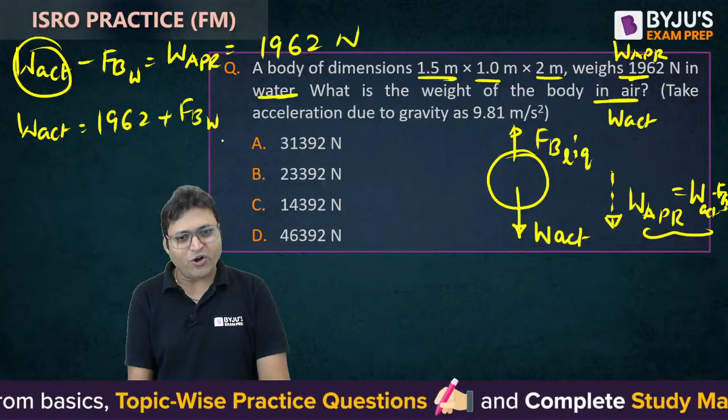According to Archimedes principle, we can find out the buoyant force by water: density of water into G, let me take as 10 because it is given as 9.81, but we can find out the nearest value, into volume of the body. It is not circular, it is a cuboid, so it is 1.5 into 1 into 2.

So 1962 plus, it will be 1.5 into 2, that's 3, so it is 30,000, almost 30,000, isn't it? So 30,000, so 31962. It is close to 31962 Newton, that is the actual weight.

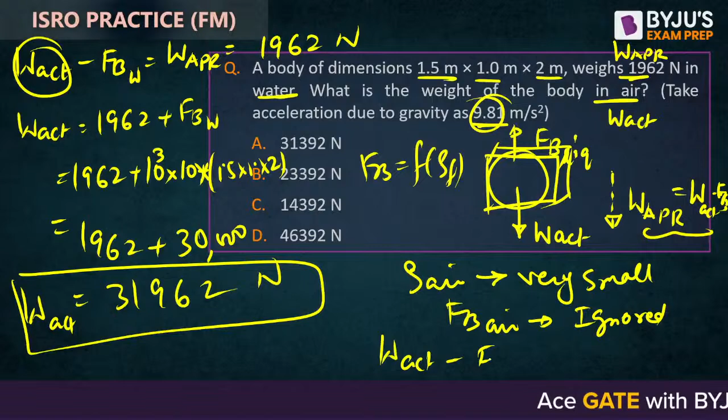Weight in air is actual weight. Why? Because the density of air is very, very small, so the buoyant force by air is ignored. Buoyant force is a function of density of the fluid. So we could have said actual weight minus buoyant force by air is equal to apparent weight. But because the buoyant force by air is 0, actual weight in air is the apparent weight in air, same as the actual weight.

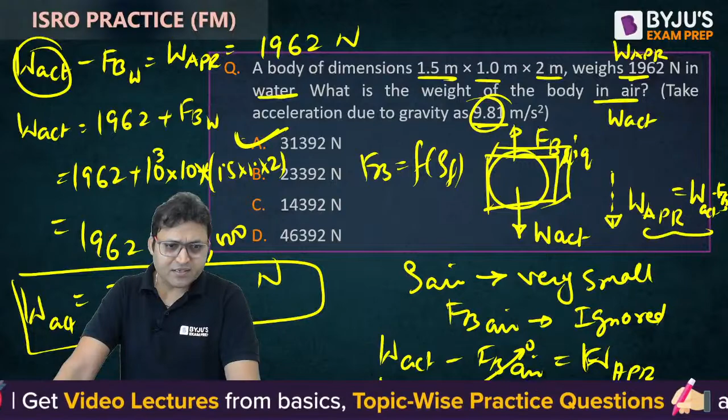So the nearest option is the correct answer. It is slightly greater than 31962... it is slightly less than 31962. A is the correct answer.

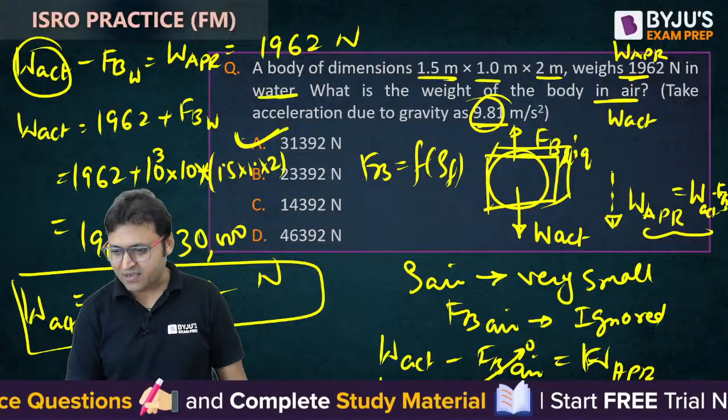Yes, well done, Hindurav, Paglesan, Shreyas, good, Deepak, great. Let us move to the next one. If anybody is having any doubt, you can just let me know.

A fluid of viscosity 0.7 Newton second per meter square - this is the dynamic viscosity. Why? Because the unit is Newton second per meter square, or we could have called it Pascal second, or we could have called it kg per meter second. These are the units of dynamic, absolute, or coefficient of viscosity.

And specific gravity is 1.3. Specific gravity is the ratio of density of the fluid to density of water.

Flowing through a circular pipe of diameter 100 mm, the maximum shear stress at the pipe wall is given as tau naught equals 196.2 Newton per meter square or Pascal. What is the pressure gradient of the flow?

What do you understand by pressure gradient? dP by dx is called pressure gradient. What is its unit? Newton per meter square upon meter, or we can call it Newton per meter cube. The gradient of any parameter is nothing but the change in that parameter with space. So pressure gradient is dP by dx.

Can you find out dP by dx? If we start with tau naught given by minus of dP by dx into capital R by 2, then dP by dx is equal to minus of 2 tau naught by R. Or R can be taken as d by 2, so we can write it as minus 4 tau naught upon diameter. This gives you dP by dx, the pressure gradient.

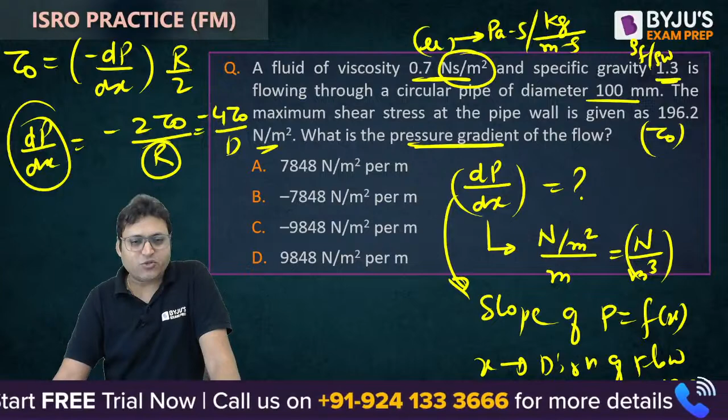This is nothing but the slope of the P versus X curve, where X is the direction of flow. In the direction of flow, the pressure decreases. As X increases, the pressure decreases, so dP by dx will be negative. So a positive value cannot be right.

So if you put the values: minus 4 into tau naught 196.2 upon diameter. What is the diameter? Do not commit a mistake in the unit - 100 mm, that is 0.1. So we can say minus 4 into 19.62, and 19.62 is 2G multiplied by 4. So 20 into 4, something around 20, slightly less than 8,000 Pascal, minus 8,000. It cannot be greater than 8,000.

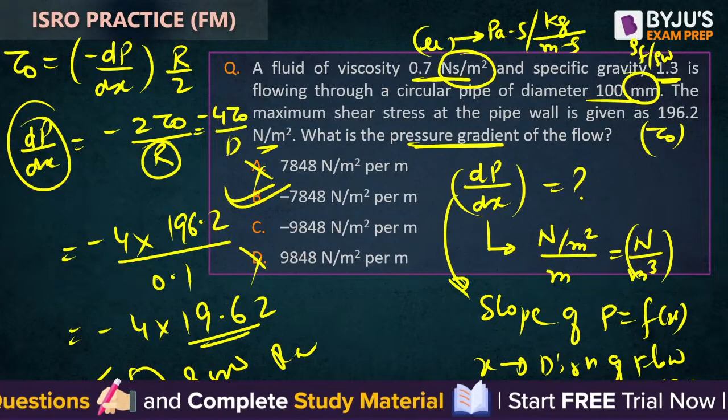So B is the right answer for the given question. How many of you have given the answer B without using the calculator? You are not supposed to use the calculator, guys. Let us move to the next one. I hope this is clear. This question is very, very simple.

Which of the following is the correct assumption for the derivation of the Bernoulli equation? What are the assumptions for the Bernoulli equation? Non-viscous flow. The Bernoulli equation is valid for ideal flow, applicable only to ideal flow - non-viscous, steady, and incompressible.

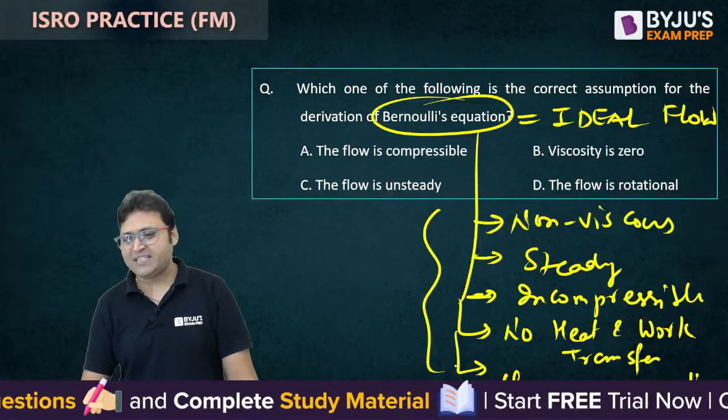Plus, we can say there is no heat and work transfer. There should not be any other form of energy transfer, and it must be applied along the streamline. These are the various assumptions. So non-viscous fluid means viscosity is 0. For compressible fluid, we do not apply the Bernoulli equation.

What equation do we apply for compressible flow? Anybody can let me know the name of the equation we apply for compressible flow? The name is the energy equation. Bernoulli equation is nothing but the energy equation, but for ideal flow - that is the energy equation for ideal flow, which is non-viscous, incompressible, steady.

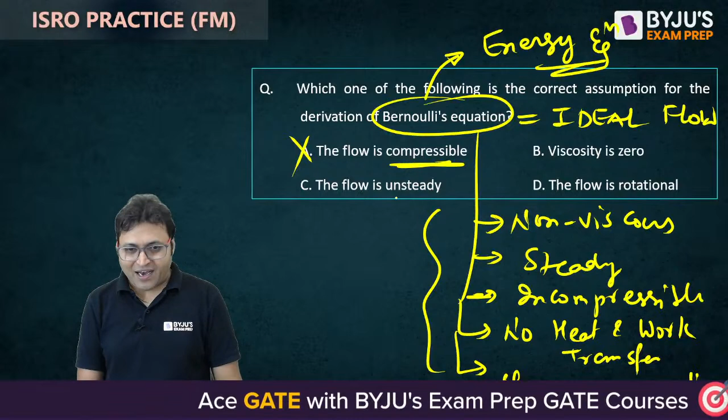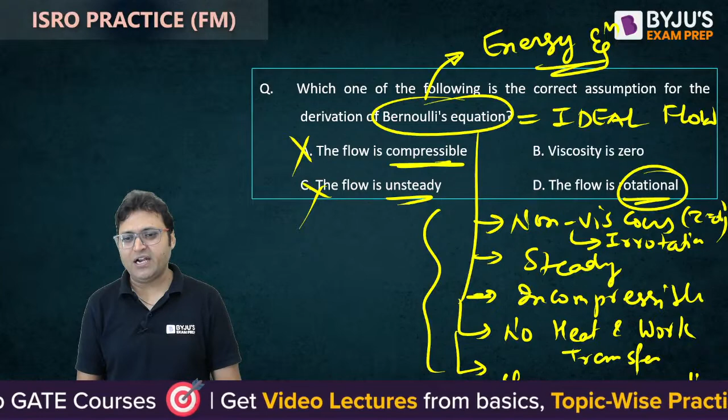Unsteady is incorrect. Rotational - when it is non-viscous, it is irrotational, because tau is equal to 0, there is no relative motion. So for compressible flow, we apply the steady flow energy equation, isn't it? Steady flow energy equation, first law of thermodynamics. We use the first law of thermodynamics.

Continuity equation is the mass conservation. I am talking about energy conservation - that is the first law of thermodynamics. Compressible fluids are analyzed using the ideal gas equation or the concept of thermodynamics. So for energy conservation, we use the first law of thermodynamics.

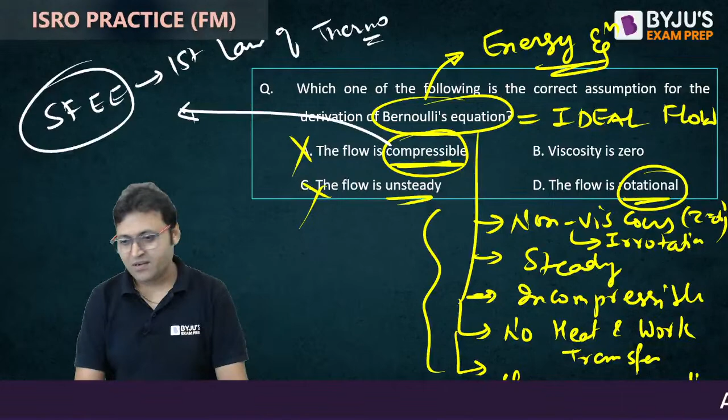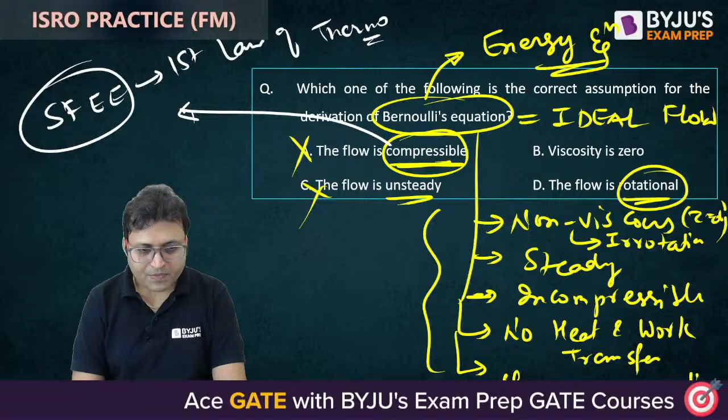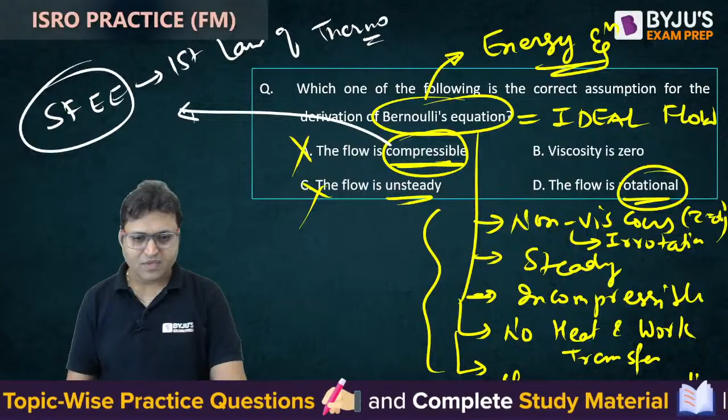For a steady flow, just hold on. Is this clear? Can you guys hear me? Hello. All right, so let us move to the next question quickly.

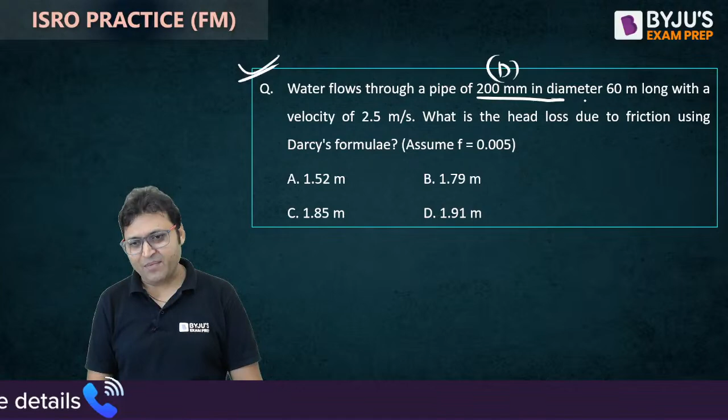Water flows through a pipe of 200 mm diameter and 60 meter long, with a velocity of 2.5 meter per second. This is the average velocity. If nothing is mentioned regarding the velocity, we will assume it to be the average velocity. Many students get confused about whether it is the average velocity or the maximum velocity. When nothing is mentioned about the velocity, we will assume it to be the average velocity only. What is the head loss due to friction?

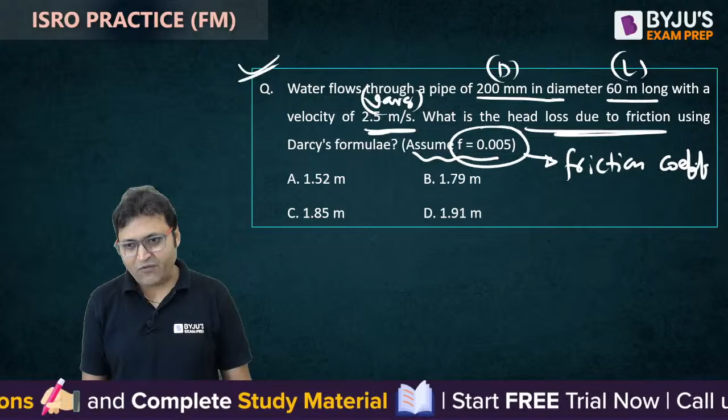Using Darcy's formula, assume F is equal to 0.005. If the value of F is very small, it is the friction coefficient. The value of friction coefficient is around 0.005, and the value of friction factor, that is 4 times the friction coefficient, is around 0.02. So we need to find out the value of frictional head loss according to the Darcy-Weisbach equation.

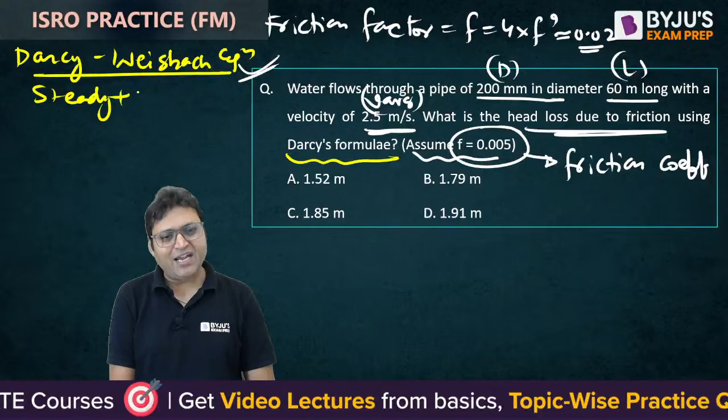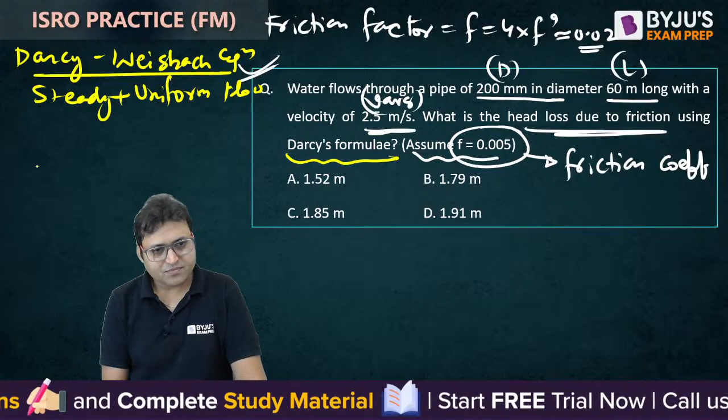According to the Darcy-Weisbach equation, do you know when we use it? Darcy-Weisbach equation is applicable to steady and uniform flow. The flow must be steady and uniform. Is it valid for laminar or turbulent flow? It is given by FLV square upon 2GD. Here F is the friction factor.

So if we put the values, no, here is where we are making a mistake. This equation is valid for laminar as well as turbulent flow, both. The only condition for the flow is that it must be steady and uniform. What does that mean? There is neither local acceleration nor convective acceleration. The condition for applying the Darcy-Weisbach equation is flow must be steady, meaning local acceleration will be 0, and flow must be uniform, meaning convective acceleration must also be 0. That is the only condition.

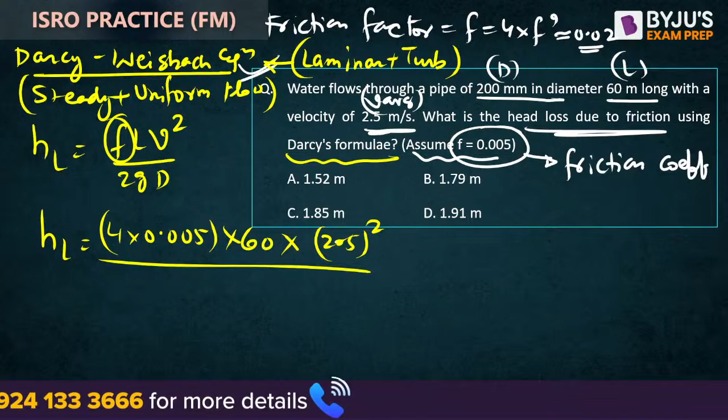So HL is given by the friction factor. Can we write 4 into 0.005 into length 60 meter into V square, that is 2.5 square, upon 2 into 9.81, let me take as 10, into diameter 200 mm, 0.2. Can you get me the answer? So 10 into 0.2, it will become 4. This will get cancelled out with this. So it is around 0.005 into 60 into 2.5 square, 6.25. Isn't it?

How much is it? This 0 will get cancelled out with this 0. So 0.05 into 6, so 0.3 into 6.25, isn't it? 0.3 into 6.25, how much is that? It is greater than 1.8. Is it 1.91 or 1.85? Tell me, will it be 1.85 or 1.91? It is looking close to 1.85 and 1.91.

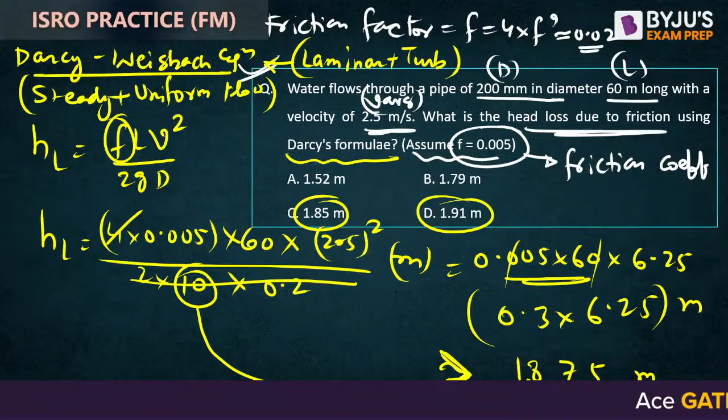The options are very close to each other. One thing is that we have rounded off here, taking acceleration due to gravity as 10. It should have been 9.81. Second, it is around 1.875. Because we have taken it as 10, if it would have been 9.81, the value would have been greater than 1.875, because the acceleration due to gravity should have been taken as 9.81. That is how you should get your answer.

So the correct answer is option D, not option C. Do you guys understand it? Why C is not correct, why D is correct. I hope this is clear.

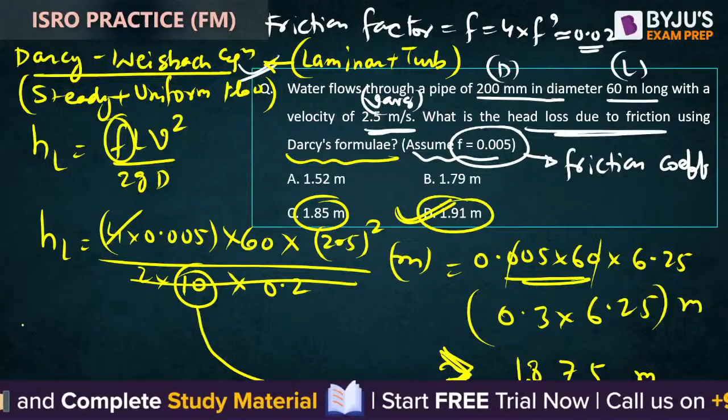If the question had asked you to find out the pressure drop, can you find out the pressure drop in this line? So HL could have been written as delta PL by rho G. So delta PL would have been rho, 10 to the power 3, into 9.81 into 1.91. What is delta P? So the value of delta PL in Pascal could have been calculated easily, whether it is laminar flow or turbulent flow, it does not matter.

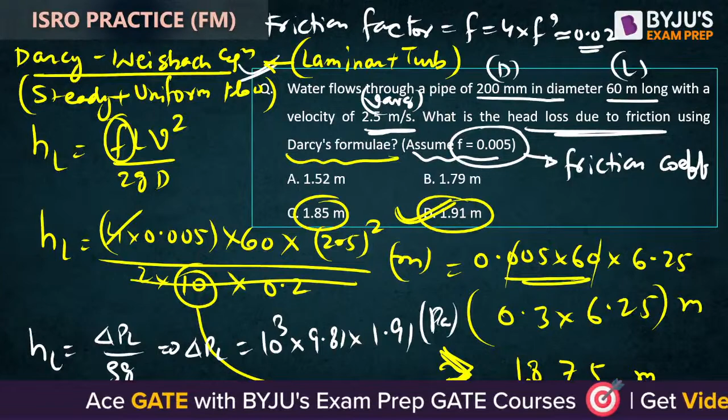Let us move to the next one. Next question on your screen. A convergent mouthpiece is discharging water under a constant head of 5 meter. The available head is 5 meter. If the diameter of the mouthpiece is 75 mm, then what is the discharge?

Q is given by area into velocity. Area can be written as pi by 4 d square, into velocity can be written as root 2gh.

Because the available head is 5 meter and the pressure is P atm, all the available head will convert into kinetic energy. So H can be taken as V square by 2G according to the energy equation. All the available head will convert into kinetic energy head, so V is equal to under root 2GH. That is how we get it.

So you need to put the value. The options are in liter per second, and 1 meter cube is equal to 1000 liter. So if we want to convert it into liter, Q is equal to 3.14 by 4 into d square, so 0.075 square, or we could have written 75 square into...

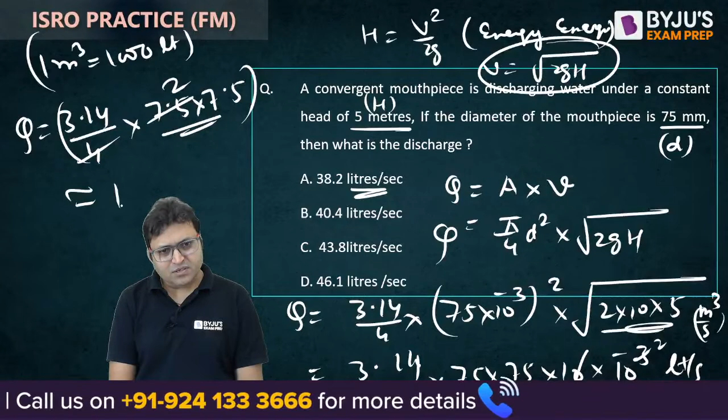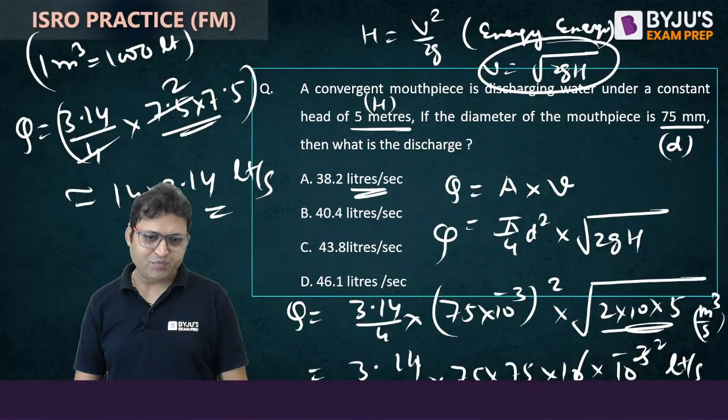Isn't it? So it will be somewhere around 2. So 14 into 3, it is around 14 into 3.14 liter per second. So it is close to 43. 43.8. Isn't it? 43.8 will be the answer. It is close to 44, in between 43 and 44. It is in between 43 and 44.

The next one. Air flows through a duct and the pitot-static tube. Pitot-static tube is used to measure the velocity of the flow. It is attached to a differential manometer containing water. The manometric fluid is water. The deflection of the manometer is 100 mm, that is the manometric fluid deflection. Assuming the density of air, the fluid is air.

It is used to measure the velocity of the gases normally. The fluid is air, the density of air is constant, which is equal to - it can be treated as incompressible fluid, that is why it is mentioned as constant, and the coefficient of the tube is 0.98. What is the velocity of the air considering the acceleration due to gravity as 9.81?

So the question is to find out velocity. Velocity is equal to CV under root of 2gx into sm by sf minus 1. That is the formula. CV is 0.98 under root of 2 into, let me take as 10. X is manometric fluid deflection is 100 mm, that is 0.1. And manometric fluid is having the density as 1000 upon 1.22 minus 1.

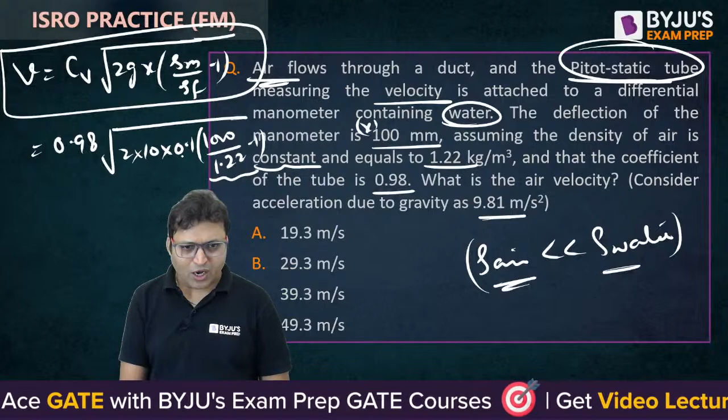Or we could have taken it as 10 only. So 10 into 10. So how much it will be? 1000 only. So it would have been around 0.98 into 2 into 10, or 10 into 0.1 into 1000 something, into 1000, so 2000.

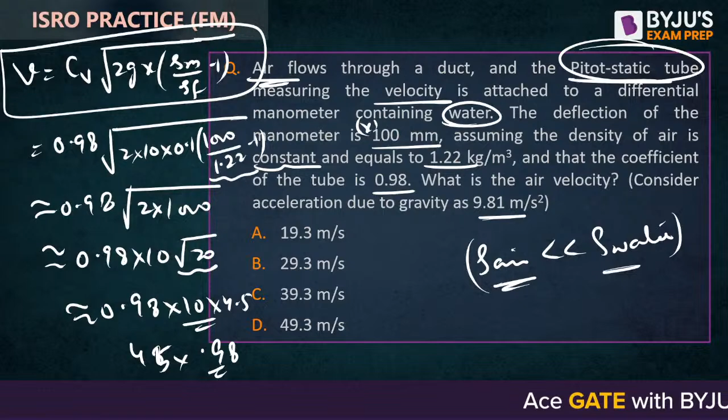So we can write it as around - can we write it as around 0.98 into 10 into root 20? And root 20 is lying between 4 and 5, it is around 4.5. So 0.98 into 10 into 4.5 something, that will give you the answer. So 4.5 into 10 is 45. 45 into 0.98, it is less than 45, less than 450.

Sorry, less than 45. It is less than 45. It is close to 45 but slightly less than 45, isn't it? What is the answer? It is less than 45. Option C, isn't it? The answer will be option C. The challenge here is you are not supposed to use the calculator. So without using the calculator, even if you do not do the exact calculation, you can reach the nearest option.

The next question on your screen. Let us have a look at the next one.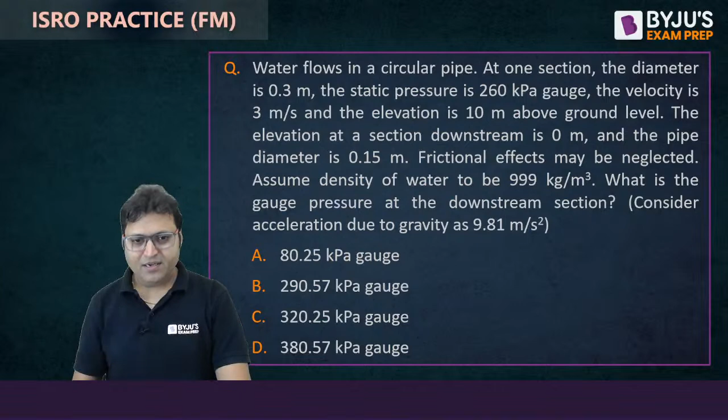Water flows in a circular pipe. The shape of the pipe is circular. At one section, the diameter is 0.3 meter, let me call it D1. The static pressure, that is P1 gauge, 260 kilopascal. The velocity is 3 meter per second, that is V1. And the elevation, that is Z1, is equal to 10 meter above the ground level.

The elevation at the section downstream is 0 meter, that is Z2, and the pipe diameter D2 is 0.15. Frictional effect may be neglected. Assume the density of water is 999, it is close to 1000. What is the gauge pressure at the downstream section?

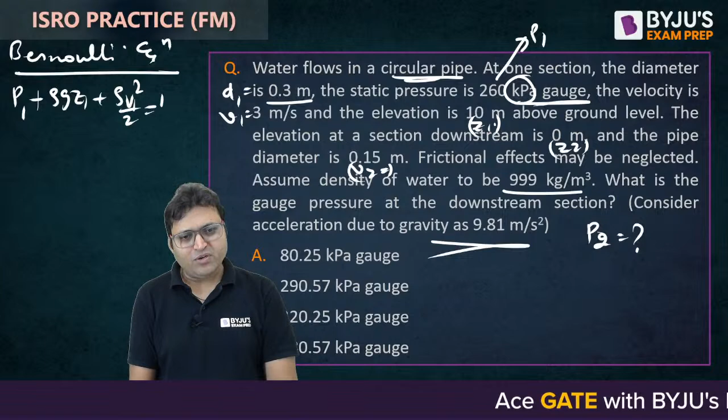We need to find out P2 gauge when the acceleration due to gravity is 9.81. So if we write the Bernoulli equation in terms of pressure: P1 plus rho g Z1 plus rho V1 square by 2 is equal to P2 plus rho g Z2 plus rho V2 square by 2. That is, P plus rho g Z plus rho V square by 2 is equal to constant.

That is another expression of the Bernoulli equation. Z2 is equal to 0. So the question is to find out P2. Can we say P2 is equal to P1 plus rho g Z1 plus rho by 2 into V1 square minus V2 square?

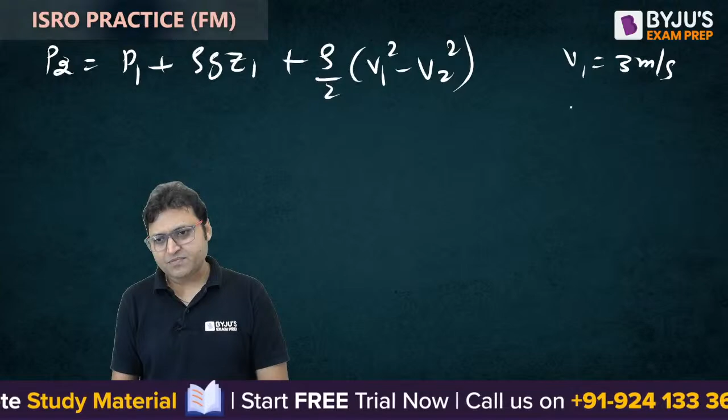What is V1? V1 is 3 meter per second. So V2 will be equal to d1 by d2 whole square into V1, that is our continuity equation. The diameter ratio d1 by d2 is 2. So V2 is equal to 4 V1, which means V2 is equal to 12 meter per second.

So if we put the value, P1 is given as 260 kilopascal. Let me use kilopascal only. P1 is 260 kilopascal plus, can you guys solve it? Rho g can be taken as 10, 10 into Z1. What is Z1? Z1 is equal to 10 meter. So we can write it as 10 into 10, that is 20, plus 1 by 2 into V1 square, 3 square minus 12 square.

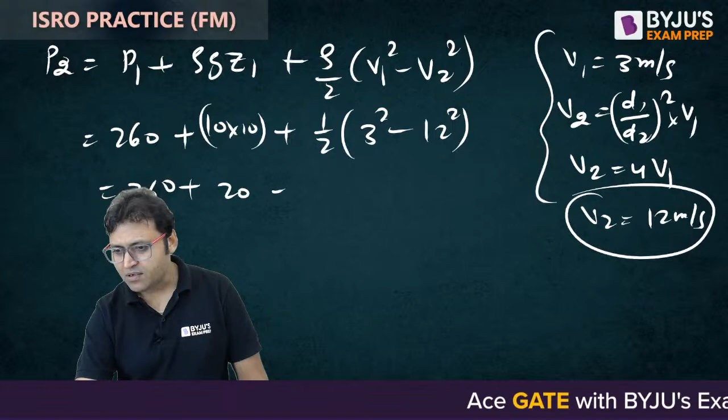So it is something around this. So it will be 260 plus 20 minus, it will be minus 144 minus 9. How much is 144 minus 9? That gives 135.

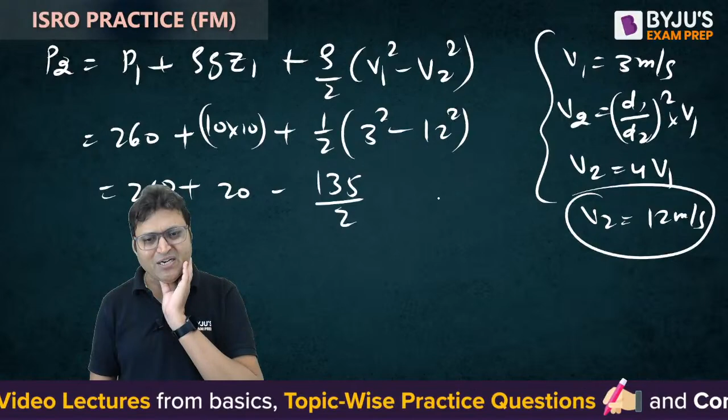135 by 2, isn't it? So how much is 135 by 2? So 280 minus something, or what you could have said, 280 minus 67.5. So it will be around 213. It will be around 213, isn't it? How much is that?

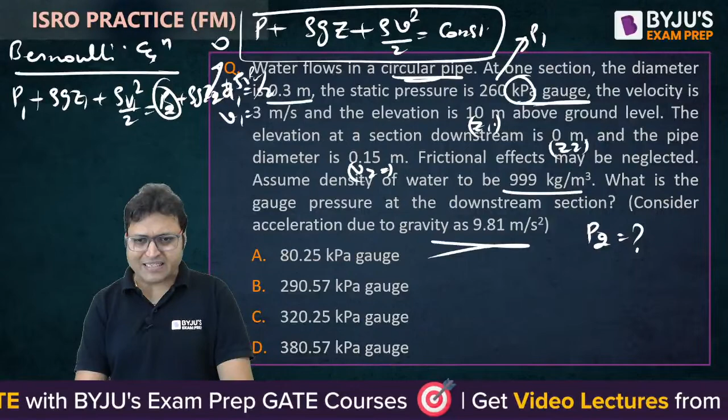Did I commit any mistake somewhere? Will it be more than P1 or less than P1? 260 kilopascal plus rho g Z1, P1 plus rho g Z1 plus rho V1 square minus rho V2 square by 2, with 12 square, gives around 130.

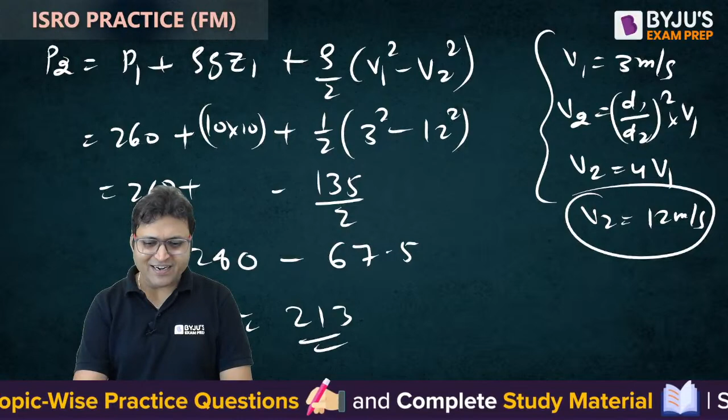So why are we not getting 290 then? 80 cannot be correct. The static pressure is P1, velocity term, and so on. It will not be 20, no. Here I have committed the mistake. It is not 20, it is 100. Isn't it 100?

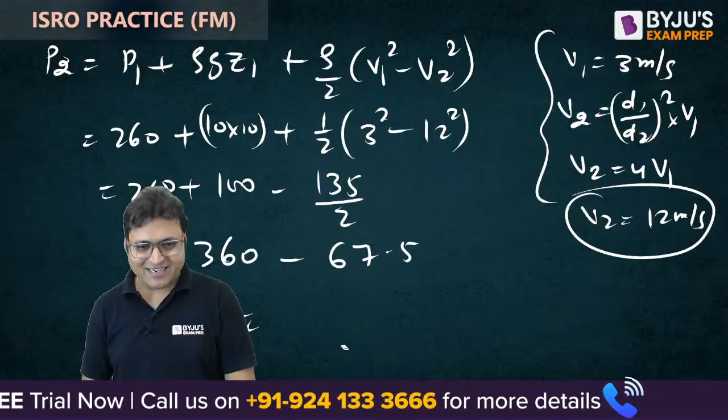260 plus 100 is 360. It will be 360 minus 67. So now it is close to 290 kilopascal, isn't it? It is close to 290. Yes, it will be 100. So 290 kilopascal will be something around the answer.

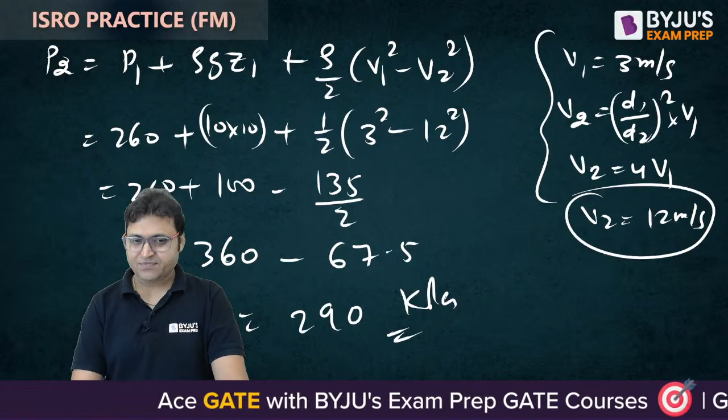Something around 290 kilopascal. I hope you understood the concept, and I hope you understood how to do the calculation without using the calculator to get the nearest correct answer, isn't it? So 260 minus 70, something around 260 minus 70, 360 minus 70, 290.

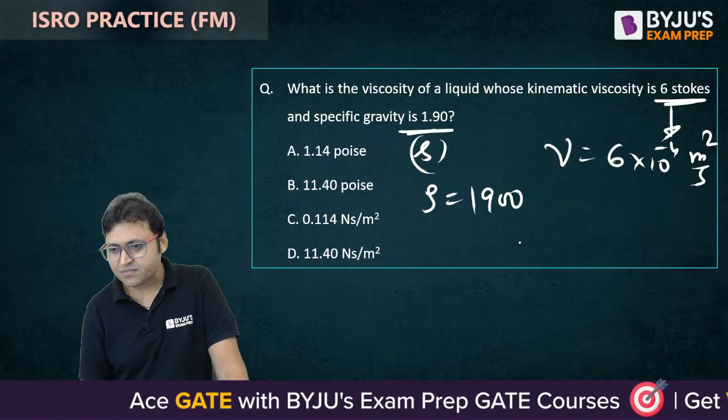What is the viscosity of the liquid whose kinematic viscosity is 6 stokes? So we can say kinematic viscosity is 6 into 10 to the power minus 4 meter square per second, and the specific gravity is 1.90. So what is the density? 1900, isn't it? 1.9 into 1000. So we need to find out the dynamic viscosity.

Viscosity equals density into kinematic viscosity. So density is 1900 into 6 into 10 to the power minus 4, which is 0.19 into 6 Pascal second, Newton second per meter square, that is Pascal second. So we can say it is around 0.2 into 6, how much is that? 1.2 Pascal second. In Pascal second it is 1.2, and in poise it is around 12.

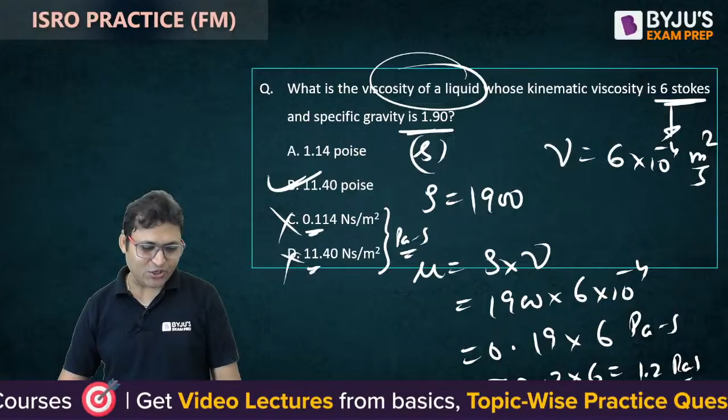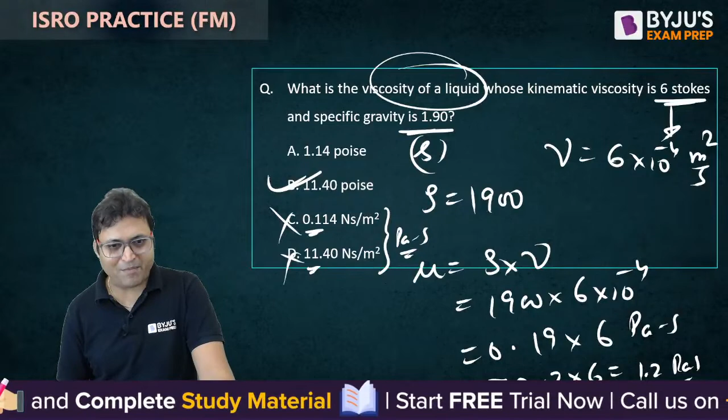The update has chances of happening in October, or September and October. There's no particular logic behind it. The only thing is because now ISRO is free from the Chandrayaan 3 launch, they can have the examination at the earliest. So there are chances in October or September.

So the answer to this question is 11.40 poise. The next one is a beautiful question. The next question is on your screen.

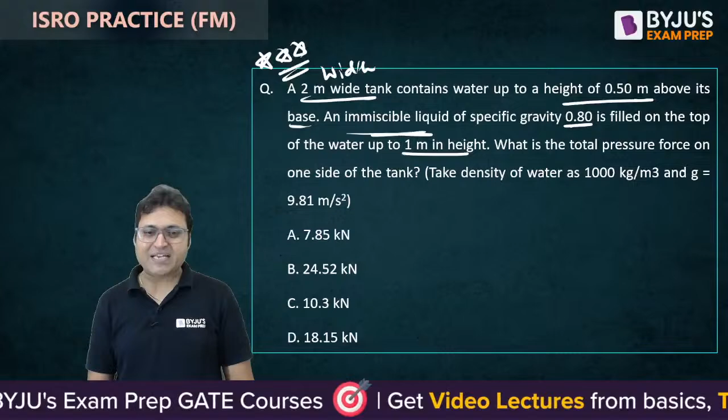A 2 meter wide tank contains water up to a height of 0.5 meter above its base. An immiscible liquid of specific gravity 0.8 is present, meaning there are multiple fluids, and many students get confused about how to analyze multiple fluids. This liquid is filled on top of the water up to a height of 1 meter. What is the total pressure force on one side of the tank? Density of water is taken as 1000 and acceleration due to gravity as 9.81.

So how to analyze this: there is a vertical plane surface of 2 meter width. The water is up to a height of 0.5 meter, and above it there is some liquid up to a height of 1 meter. This height is 1 meter and this height is 0.5 meter. This is the free surface.

So the simplest way to write the pressure force is average pressure into area. There are two surfaces, or we can say it can be divided into two parts, 1 and 2. So P1, PG1 - PG is the average pressure. The pressure acting at the centroid is called average pressure, which is constant, plus average pressure at G2 into A2.

So if we want G1, G1 is somewhere here, and G2 is the centroid of the second surface, like this - this is G2. So what is PG1? Can you find out PG1?

PG1 is equal to density of liquid, 0.8, if we want it in kilonewton - the options are in kilonewton, you can check the options first - so if you want the answer in kilonewton, that is why we will take the specific gravity rather than density: rho into G into x bar, x1 bar.

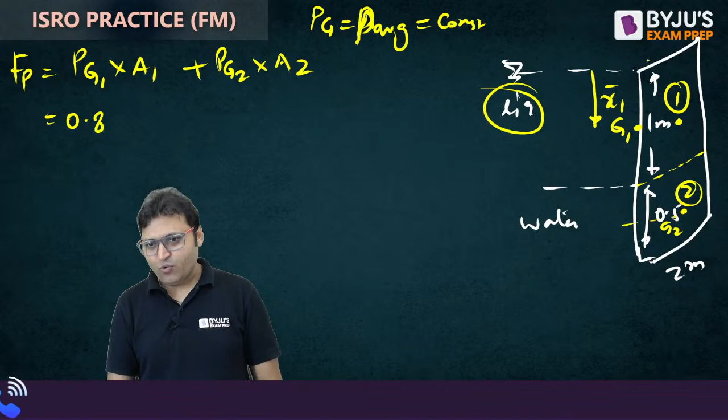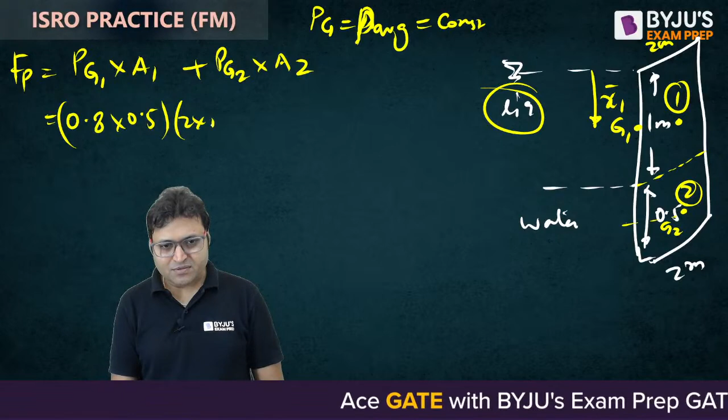What is the depth of centroid G1? Height is 1 meter, so it is 0.5. Then A1, what is A1? This is 2 meter, so 2 into 1. This is PG1 into A1.

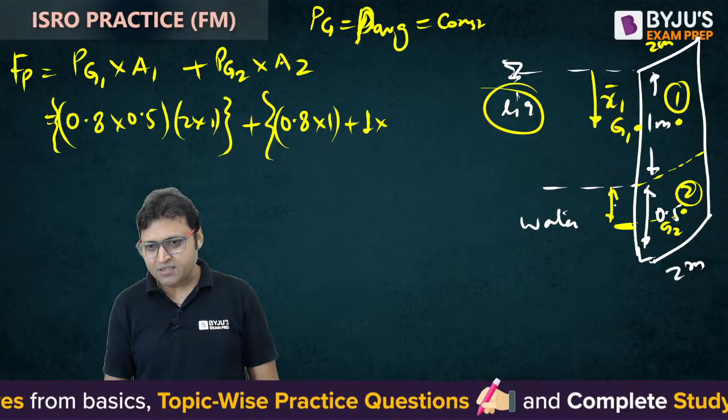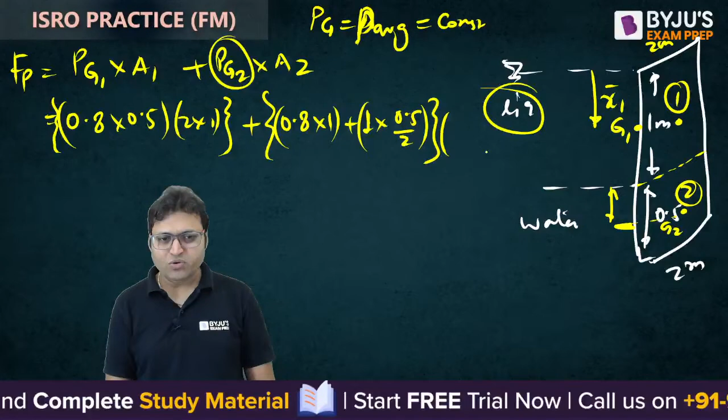Are you getting it? What is PG2? What is the pressure here? We will say rho G into 1, so 0.8 into 1 meter plus 1 into 0.5 by 2, multiplied by - this is the pressure PG2, this is the pressure into area 2 into 0.5, and then multiplied by 10 and by G. This will give you kilonewton.

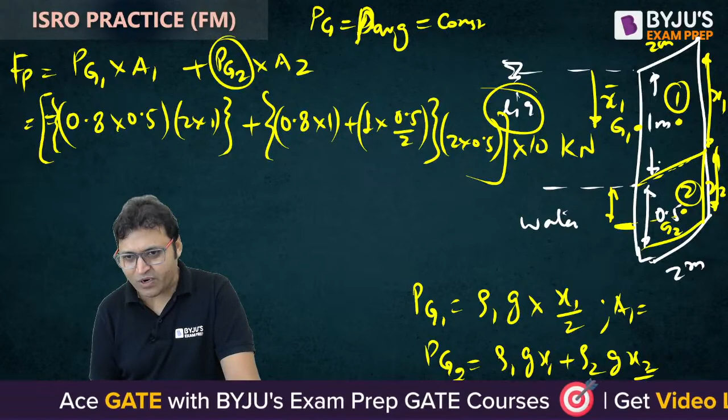I hope you understand. What I wrote is PG1 is equal to rho1 G into x1 by 2, let me call it x1. And what is PG2? That is rho1 into G into x1 plus rho2 into G into x2 by 2, that is PG2, let us say this is x2. And A1 is equal to x1 into B, where B is the width, and A2 will be equal to x2 into B. That is what we have used.

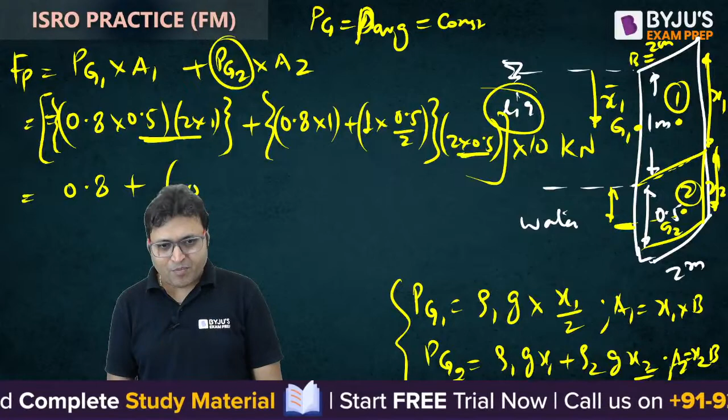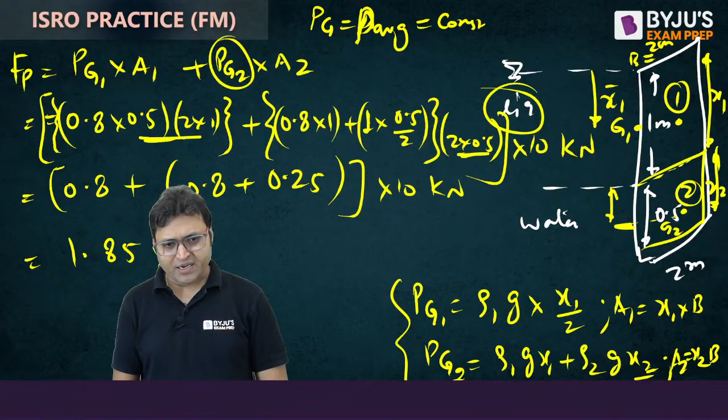So if you simplify this, 0.5 into 2 is 1, so it will be 0.8 plus, then 2 into 0.5 is again 1, so it will be 0.8 plus 0.5 by 2, that is 0.25, then multiplied by 10 kilonewton. So 0.8 plus 0.8 is 1.6... 1.85 into 10 kilonewton, so it is around 18.5 kilonewton.

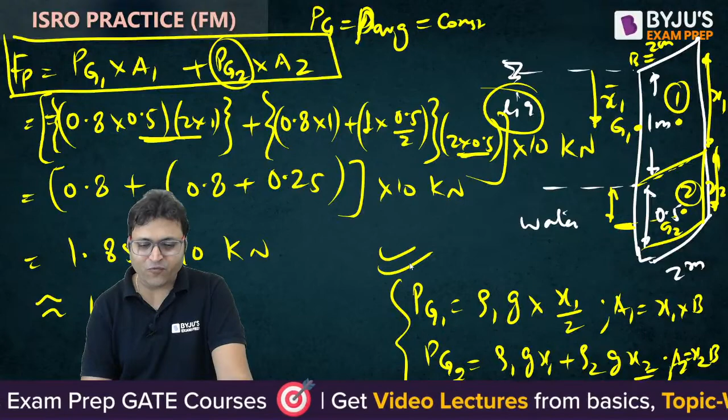Are you guys getting around 18.5 kilonewton? Do you understand this concept or not? The answer will be very much close to 18.5 kilonewton.

When there are multiple fluids, you can easily solve by taking the average pressure at the centroid G1 and the average pressure at centroid G2. I hope you guys understood this. Yes or no? Is this clear to everyone?

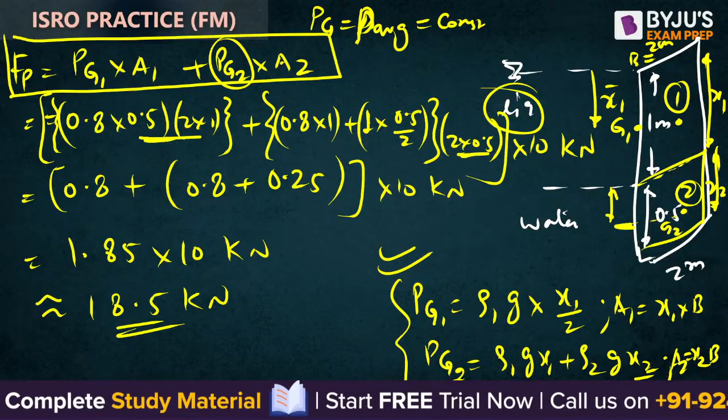The next question is from boundary layer theory. Air at standard condition flows over a flat plate. The free stream velocity is 3 meters per second. What is the thickness of the boundary layer at a distance of 1 meter from the leading edge of the plate?

Take the kinematic viscosity of air as 1.5 into 10 to the power minus 5, with unit meter square per second. The density is given as 1.23.

First we need to find the Reynolds number to check whether the boundary layer is laminar or turbulent at x equal to 1 meter. It will be U infinity into x by kinematic viscosity. U infinity is 3, x is 1 meter, upon kinematic viscosity 1.5 into 10 to the power minus 5. So it will be 2 into 10 to the power 5, which is less than 5 into 10 to the power 5. So it is a laminar boundary layer.

When the Reynolds number is less than 5 into 10 to the power 5, the boundary layer will be laminar. So delta x equals 4.64x upon under root of Rex. Can you do the calculation? 4.64 into 1 upon under root of 2 into 10 to the power 5.

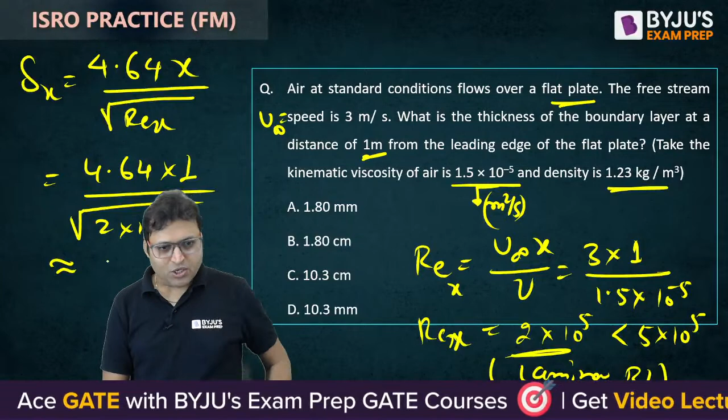How much is that? 4.64 divided by 10 to the power 4, it means 100 into root 20. Root 20 is almost 4.5, greater than 4, less than 5. So it is around 4.64 upon 100 into 4.5 meter. If we want it in centimeter, multiply by 100. So it will be somewhere around, slightly greater than 1 centimeter, isn't it?

But is it B or D? 1.8 mm is not correct, 10.3 centimeter is not correct. What about B or D? Which one of them is the correct answer? Is it B or D?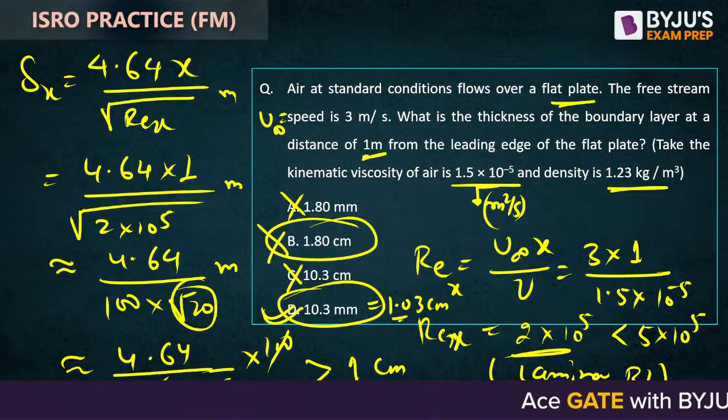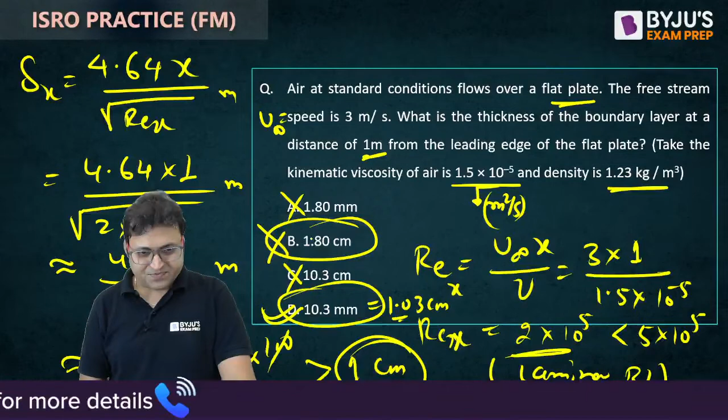It should be very much close to 1 centimeter, slightly greater than 1 centimeter. So 1.03 is more appropriate if you would have used the calculator. Sometimes it happens, listen very carefully, you might have two options very much close to your answer. But in that case, you should always check where you made the calculation round off, so you should be very careful about selecting the right answer. I hope this is clear to everyone, and I hope you learned from this. 1.8 is not close, 1.03 is more closer.

The next question: water is flowing with a velocity of 1.5 meter per second in a pipe, this is the average velocity, in a pipe of length 2500, diameter 500 millimeter. A valve is provided at the end of the pipe. What is the rise in pressure if the valve is closed in 25 seconds? Time taken to close the valve is 25 seconds.

So we need to find out whether it is a gradual closure or a sudden closure. The velocity of the pressure wave, or velocity of sound in the fluid, is taken as 1460. The question is from water hammer, or unsteady flow.

Acha. Oh, sorry, Pawan. I forgot. I was not aware that there is a ticker moving. Areva, hydrology is also there. It means you are from civil branch, hydrology.

So, what is the critical time of closing the valve? 2L/c, that is critical, that will be the deciding factor, critical time. So if the actual time is less than critical time, then it is sudden closure. If the actual time is greater than critical time, then it is a gradual closure. In case of sudden closure, we use the energy conservation, the energy equation.

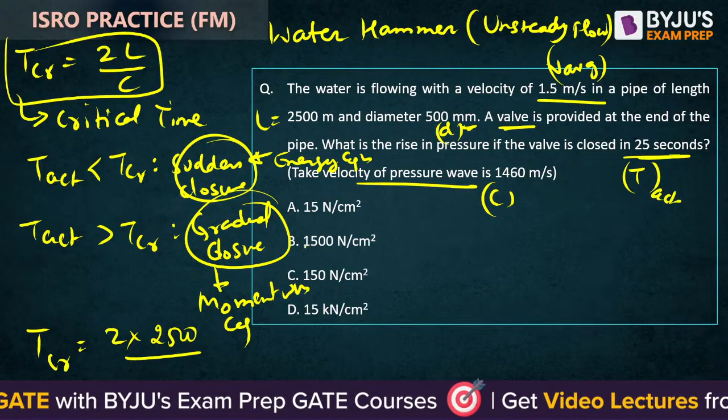In case of sudden closure, we use the energy equation, and in case of gradual closure, we use the momentum equation. So first we need to check whether the time of closing the valve is less than critical. What is critical time? 2 into L, L is 2500, by C, C is the velocity of the pressure wave, 1460.

So it is close to, can we write it as 2 into 2500 upon 1500? So 10 by 3, something around 3.33 seconds. So critical time will be 3.33 seconds and actual time is 25 seconds. So actual time is greater than critical time, so it is gradual closure. Because the valve closure is gradual, we can apply the momentum equation. This is the pipe, let us say.

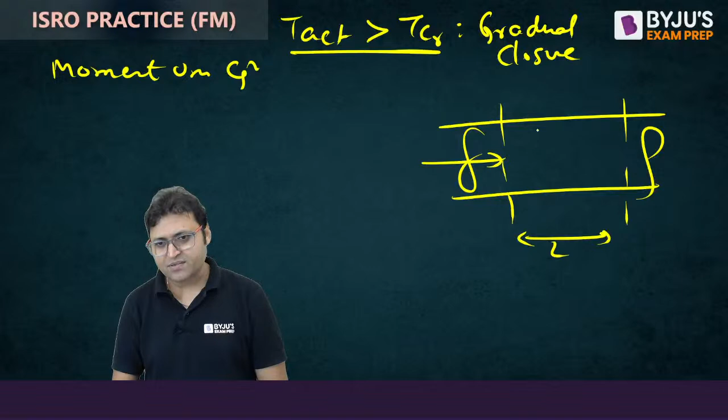We are analyzing this length L. Here the velocity is V, and because it is a gradual closure, velocity is decreasing from V to 0. The velocity is becoming 0 in this length L.

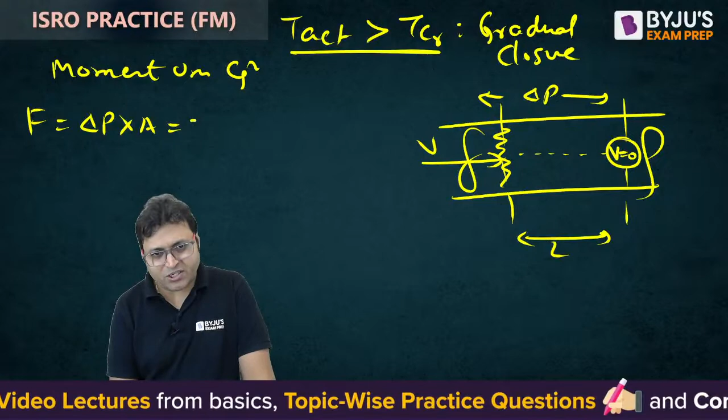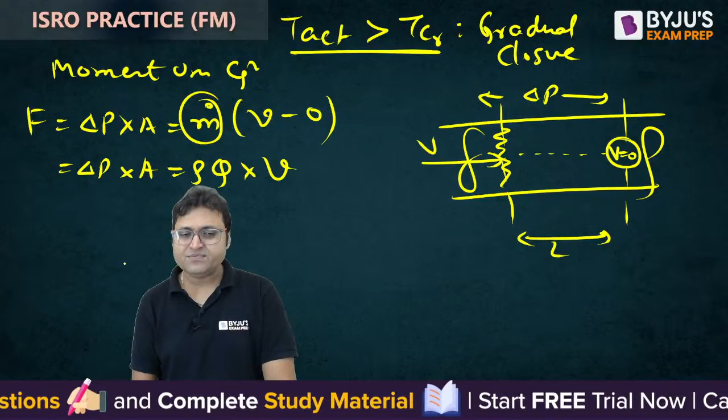So the force exerted, that is change in pressure delta P into area, is equal to rate of change of linear momentum, which is mass flow rate into change in velocity. So delta P into area equals mass flow rate, which is density into discharge into V. And discharge is volume per unit time, so A into L by T actual into V.

Delta P into area gets cancelled out. So delta P is simply rho into L into V upon T actual. Density is 1000, it is water, length is 2500, velocity is given by 1.5 meter per second, and the actual time of closing the valve is 25 seconds.

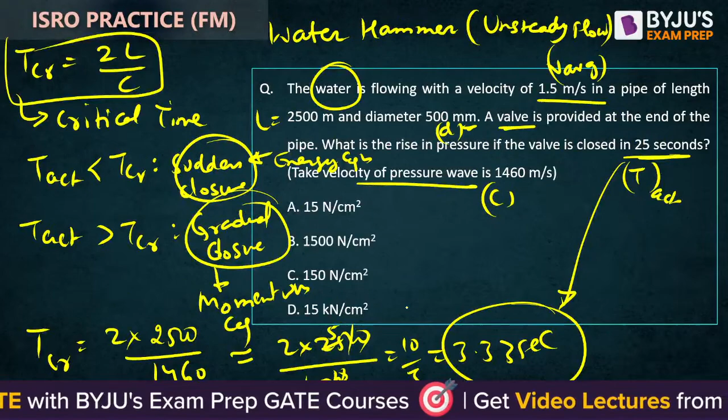So 2500 by 25, it will be 100. So it will be, in Pascal, the answer will be 1.5 or 150 into 10 to the power 3 Newton per meter square or Pascal. It is 150 into 10 to the power 3 Pascal, or 150 kilopascal.

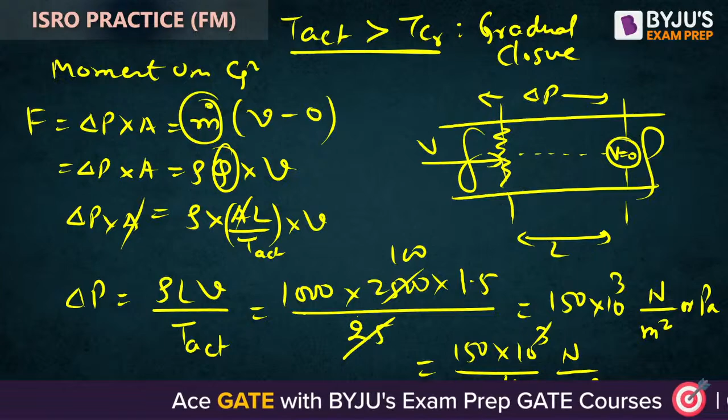The options are in Newton per centimeter square and one is in kilonewton per centimeter square. If you want to convert it, 1 meter is 100 centimeter. So 150 into 10 to the power 3 upon 10 to the power 4 Newton per centimeter square. This will be 15 Newton per centimeter square. Option A is the correct answer for this one.

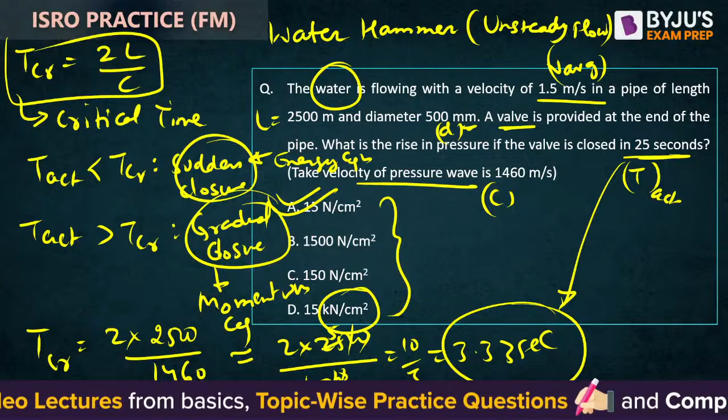Let us discuss one last question. The stream function is given by this expression, psi as a function of x and y. It is 2D flow. What is the resultant velocity at point x is equal to 2 and y is equal to 3?

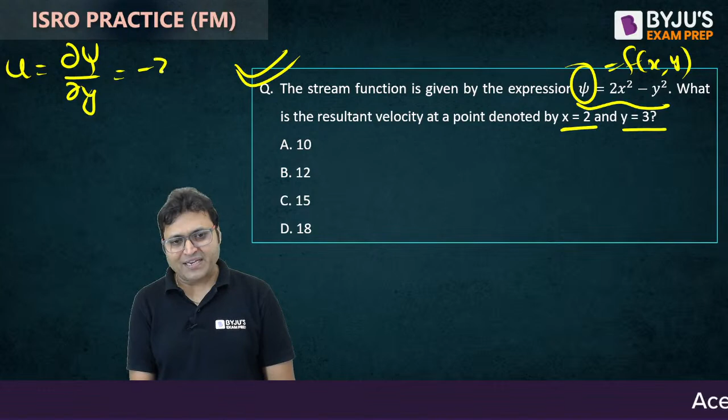The velocity in x direction is del psi by del y. What is del psi by del y? Minus 2y, so it will be minus 2 into y is 3, so minus 6. What is v?

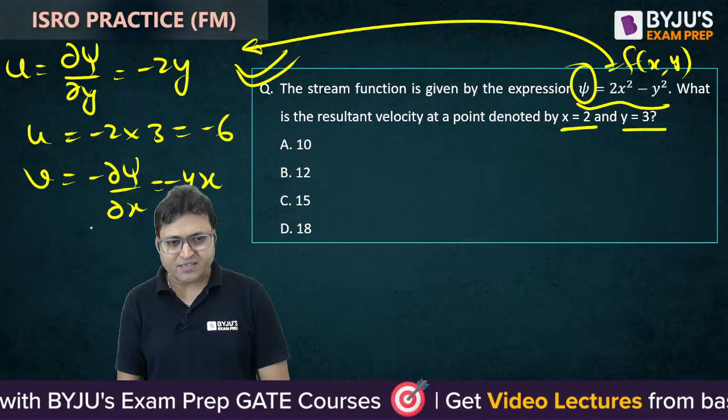Minus of del psi by del x. Differentiate psi with respect to x: 4x, so minus 4x. So v is equal to minus 4 into x. X is 2, so minus 8.

U is minus 6, V is minus 8. So the resultant velocity is under root of u square plus v square, that is under root of minus 6 square plus minus 8 square, which is 36 plus 64, under root of 100, that is 10 meter per second. That is the resultant velocity.